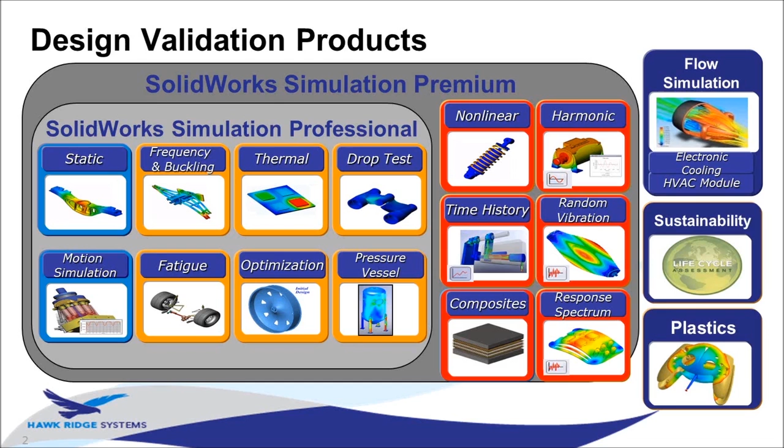Today we're going to take a look at what's new in 2014 with the SOLIDWORKS analysis tools. SOLIDWORKS offers a wide range of design validation products, including SOLIDWORKS simulation, flow simulation, sustainability, and plastics. We'll focus on the main highlights within each, starting with SOLIDWORKS simulation. Enhancements include the ability to automatically convert toolbox fasteners to bolt connectors, a new plot called contact visualization, the ability to mirror results when using symmetry fixtures, a contact pressure plot in a 2D simplification study, and an overall improved workflow when creating result plots.

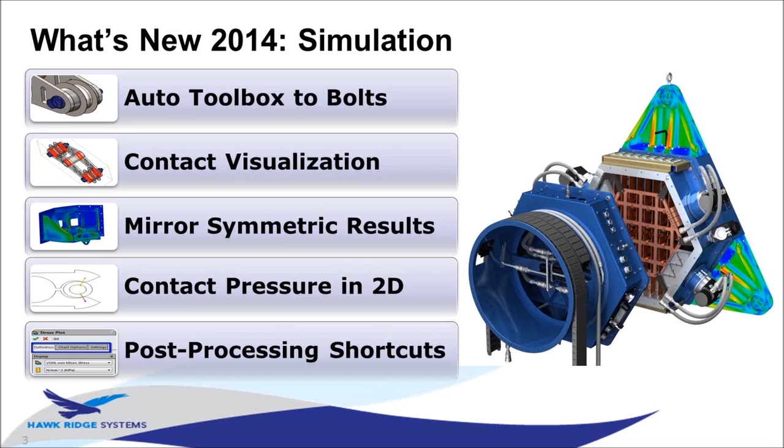We can now automatically convert our toolbox fasteners to bolt connectors when creating a static or nonlinear study. This functionality is only available with Simulation Professional licenses and above.

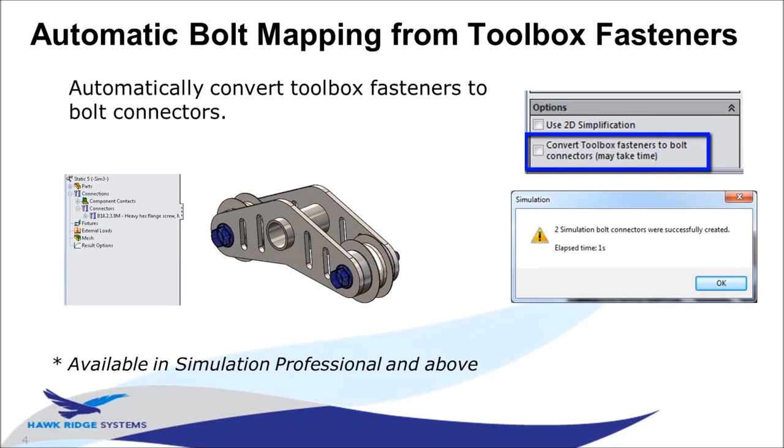In my assembly here, I have 4 different toolbox components, 2 bolts and 2 nuts. Previously, the workflow would be to suppress these 4 components, start a new study, and then manually create the connectors. Now I'm just going to create a new static study, but at the very bottom under options, we have the ability to check the box to convert toolbox fasteners to bolt connectors.

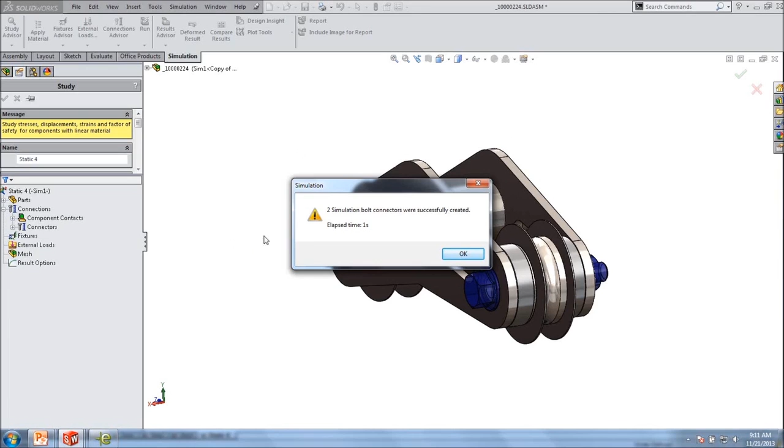When I click OK, it scans my assembly looking at the fasteners, and I get a message telling me that 2 simulation bolt connectors were successfully created. I can see them in my connectors folder. When I expand the parts list, I get an additional folder showing the components being excluded from the analysis since they were converted to connectors.

If I edit the definition on one of these bolts, we'll see that the corresponding edges and size of the bolt and nut were inputted automatically. It also pulled the material information from the toolbox fasteners, as well as the strength data and preload.

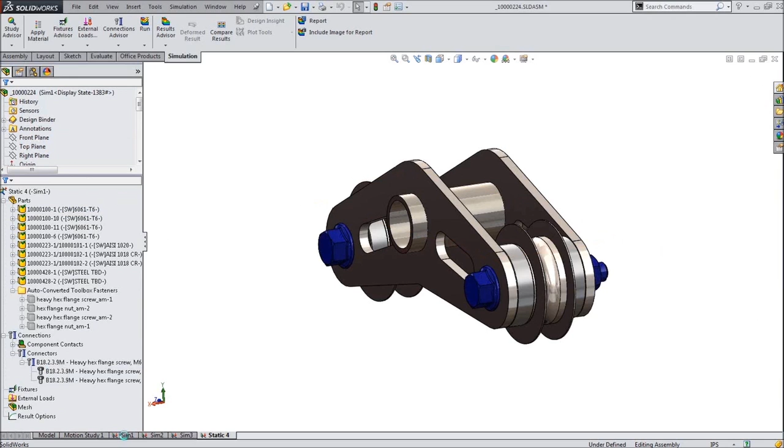After we run a study with any connector, we now have the ability to say list connector force. Previously we just had the option to list pin bolt bearing force. We see that this new connector force is part of the result force menu.

When I click on any of these rows, we'll get a flag appearing pointing us to the location of the connector with the corresponding forces. The other great thing about this is now we can also show the forces in spring connectors, spot welds, and links. So we're not just limited to looking at the pins, bolts, or bearing connectors.

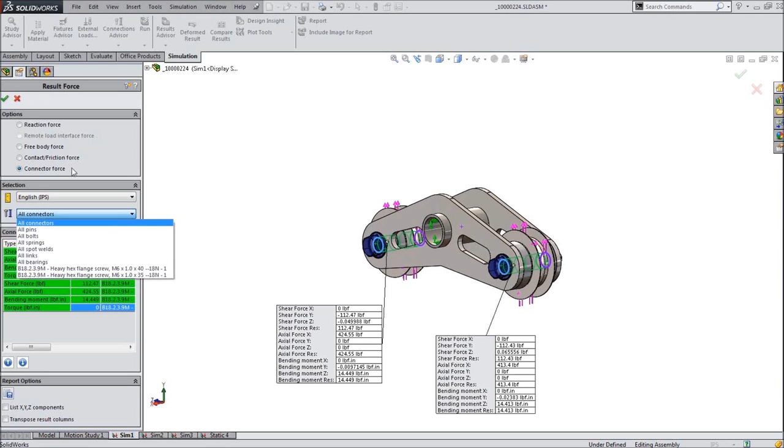For this assembly, I also wanted to take a look at some of the changes by modifying this front plate. Right now I just have these 2 slot cuts, but what happens if I didn't have any cutouts at all? How would my stress be affected? I have an additional simulation study and configuration for this, so I need to go to that study, activate the SOLIDWORKS configuration, and then show my stress plot to try to compare the results between those studies.

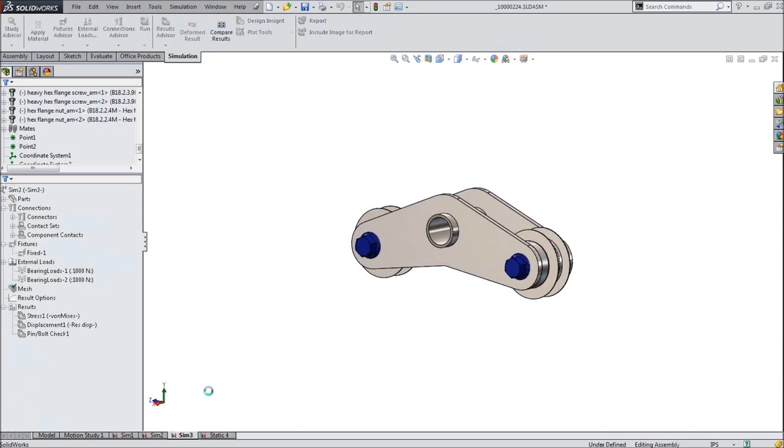I also have one where I have 4 vertical slots. Again, I need to activate the study, activate the SOLIDWORKS configuration, then show my stress plot.

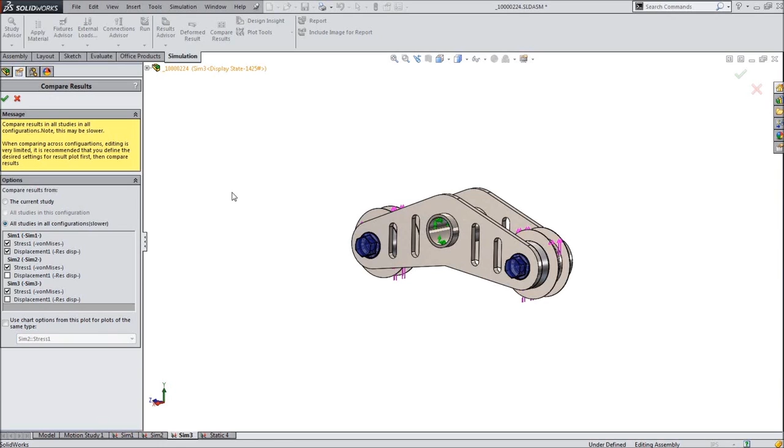In SOLIDWORKS 2014, we can now use the compare results tool to compare the results of our simulation studies across all of the different configurations for our model. Previously we could use this tool to compare the results of all the studies just with one configuration.

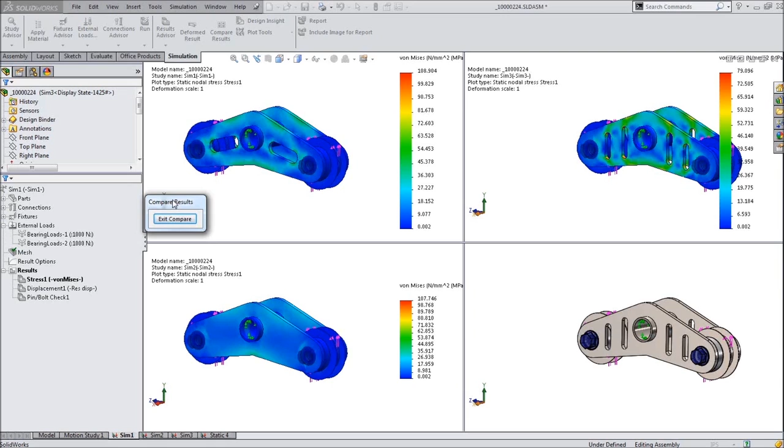I'm going to click OK, and now we get this nice tiled view showing the results of all 3 of those studies within one graphics window. No more switching between studies, activating the different configurations, showing the plots, and trying to compare them that way. Now we can do it all within one window, saving us a lot of time.

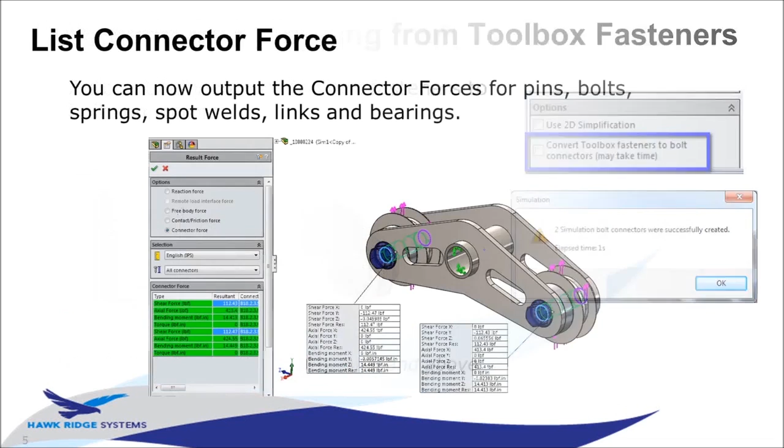So we saw the ability to automatically convert our toolbox fasteners to bolt connectors, the new list connector force menu, and the ability to compare results across configurations.

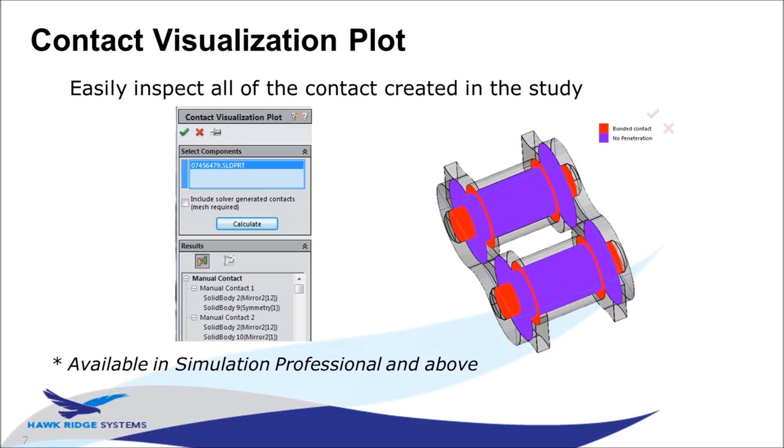We can also enable this new plot called contact visualization, which allows us to easily look at all of the different contacts within our study—not just the global contact conditions, but also the local contact sets. Again, this functionality is only available with Simulation Professional licenses and above, but it's going to be a real time saver to make sure we have all of our contacts properly set up within our analysis.

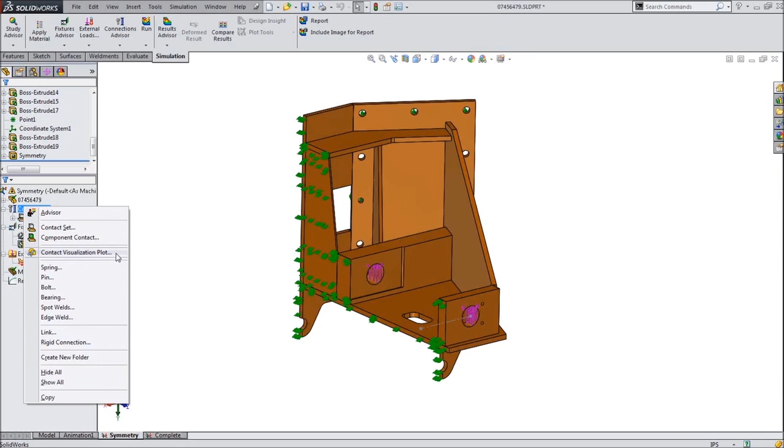So in this study, I manually created bonded contacts between all of the different faces. I'm going to right click on connections and enable this contact visualization plot. I just press calculate, and now I see all of the faces highlight that have that bonded contact, and I can click on each one in the list to see which faces are indeed being bonded together for that contact set.

Previously, if I wanted to get an idea of which faces would be bonded with just the global bonded contact, we could have run interference detection treating coincidence as interference. But that wouldn't really help me if I had any gaps in my model where I manually created the contact sets, or if I wanted to see where the different contact types are.

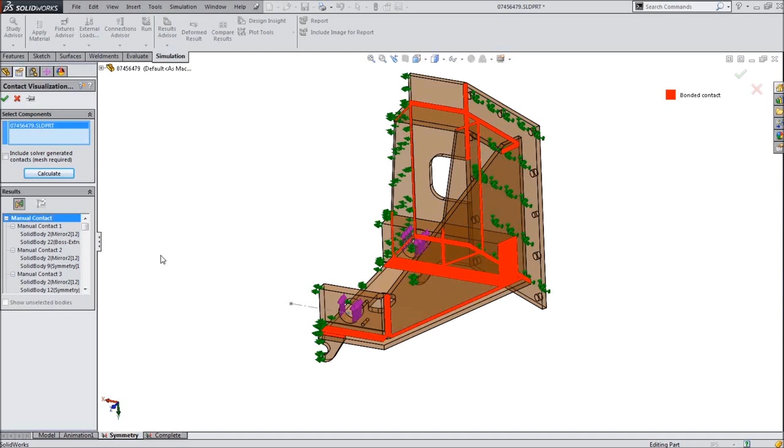So if I had some no penetration contacts, those would also highlight here in a different color. If I just wanted to see the contacts between certain bodies, I can just select them from the graphics window, press calculate again, and now it's pretty obvious that I indeed forgot to create one contact set between these two plates. So I definitely want to do that before running my study.

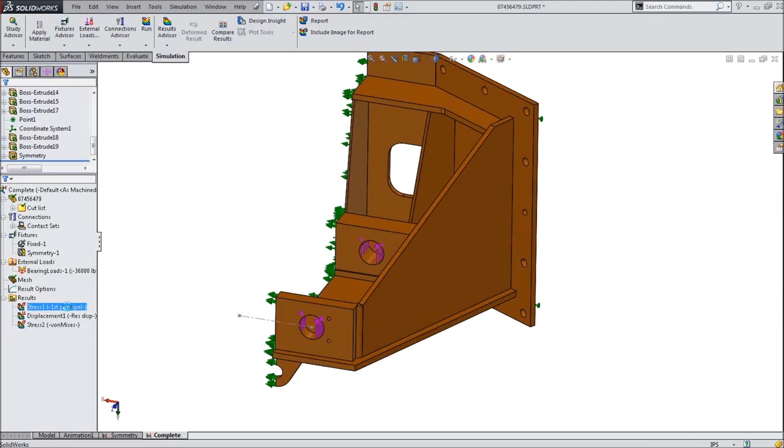Also, for this study, I use this symmetry fixture, and if you notice when I activated my stress plot, I can now see my stress across the entire model, not just the half that we actually meshed and ran using the symmetry fixture. The reason for this is if I go to edit definition of my stress plot, under advanced options, we now have this checkbox to display symmetric results.

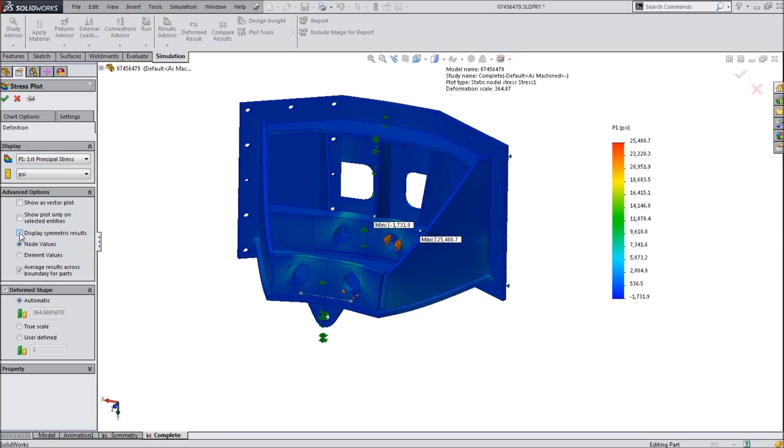So if I uncheck this and press OK, now this is what we used to have previously, just looking at our results on the actual model that we meshed and set up the study for. But with this symmetry fixture, just go to edit definition, go to advanced options, and say display symmetric results. So that was our mirrored results across planes of symmetry.

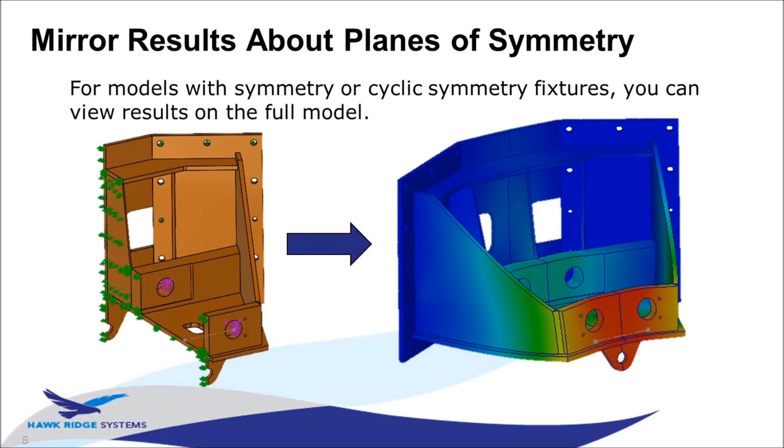And now here's my favorite enhancements within SOLIDWORKS simulation, just small little changes, but they're going to greatly improve the usability in creating your result plots. For example, we now have combined access to the edit definition, chart options, and settings within the same property manager.

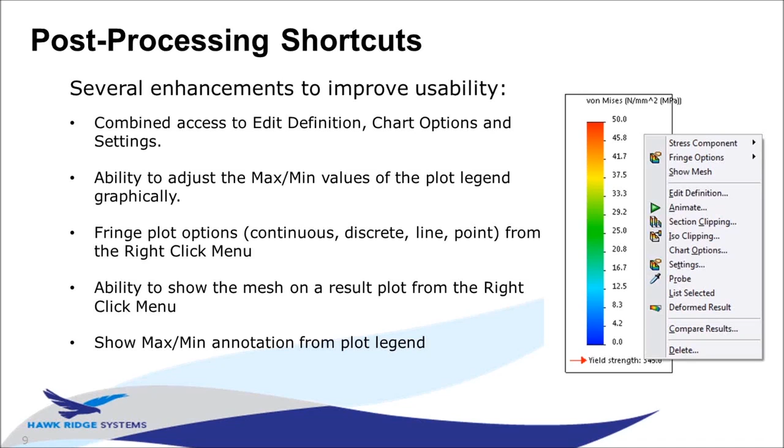We can modify a lot of these values just by right clicking on the legend, and we can dynamically change the minimum and maximum values of our legend just by clicking on that value in the graphics window. You might have noticed this when I went to edit definition of the stress plot. I now have the tabs to modify the chart options and settings within the same menu. So if I wanted to go to like a discrete color plot, maybe change my chart options to a user-defined scale.

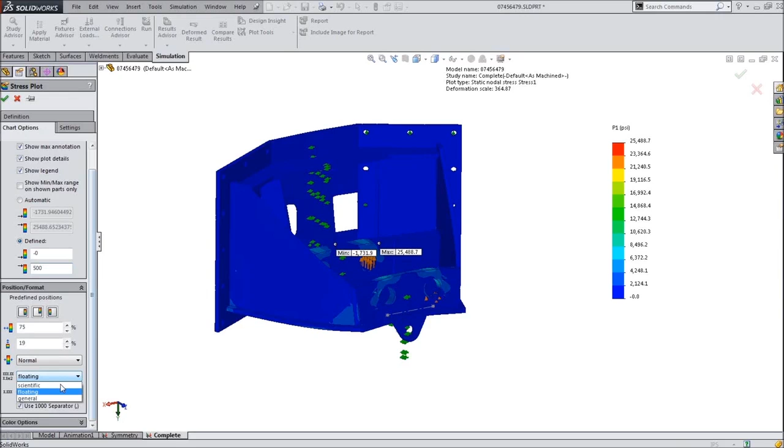Say between 0 and 500. I could also change the number format to scientific. And now I was able to modify all of those options again just within the same property manager.

So you're not going to have to remember, well, where's that option to show my undeformed shape over my model, or where do I show my mesh, or how do I change the legend, how do I change the deformation scale, or the different stress types. We can do that all within the same menu, saving you a lot of time and simplifying the workflow and just creating the result plot that you need.

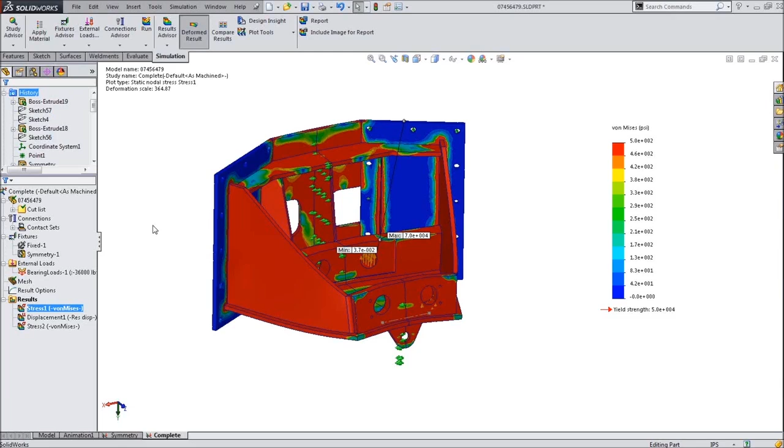A few other options we have: if we just right click on the legend, we can now show the mesh, change the fringe options, or change the actual component of the plot that we're looking at. So here, instead of looking at the resultant displacement, if you just want to see the vertical, we can switch to the Y displacement plot to again dynamically update our result plot.

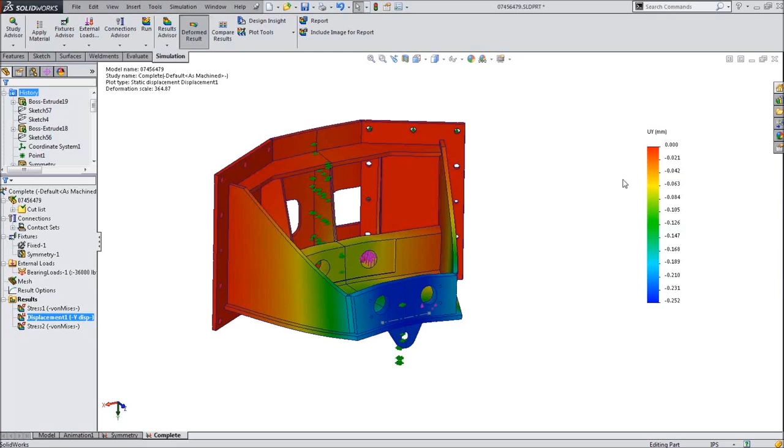I can also right click and say show mesh to overlay our mesh over our model. And if I wanted to change the minimum and maximum values of my legend, I can just click on the value in the graphics window here and then type in the value that I want. So I can say I want a max of 50 MPa, click the green check, and now my plot updates automatically.

What if I want to find out where this maximum stress is? Again, click on the value on the legend, and we can click on the show annotation flag, and now I get my max annotation. I can do the same thing with the minimum.

If I want to turn any of them off or reset them, just click on the value again. If I want to go back to my overall max stress, just reset the maximum. Click OK.

Again, just a lot of small changes, but really huge time savers when you're setting up your result plots. Just changing the min-max value of your legend, enabling the minimum maximum annotation flag, showing the mesh from the right click menu, changing the actual type of result from the right click menu, or when you actually go to the edit definition, chart options, or settings, you'll have tabs to change all of those options within the same property manager.

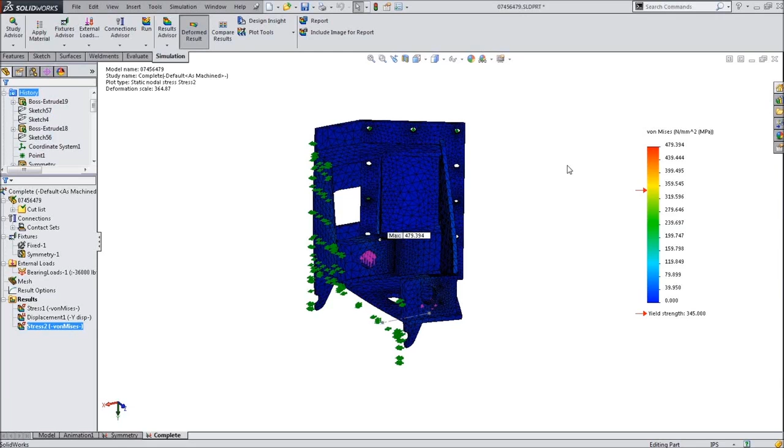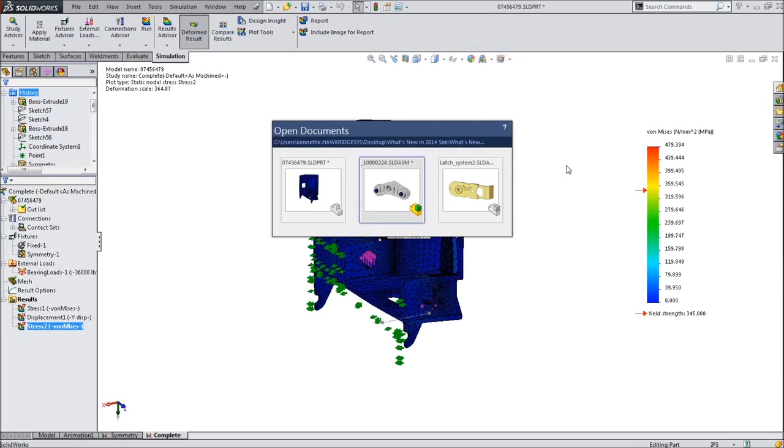If you set up a 2D simplification study, again, this functionality is available with SOLIDWORKS Simulation Professional and above, we can now look at a contact pressure plot. So here I have this latch assembly, and I want to run a nonlinear study to show my latch closing

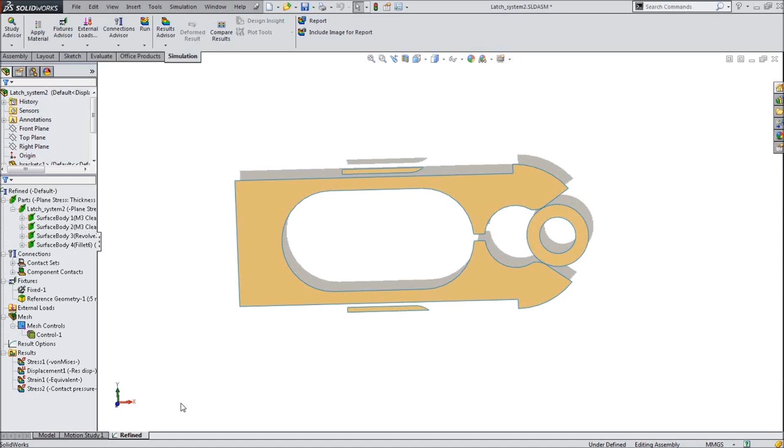and opening, and I want to see the forces as this latch locks. So I have a 2D simplification study, nonlinear study already created, and we can look at the stress and displacement. But for the stress plot, we also have this contact pressure.

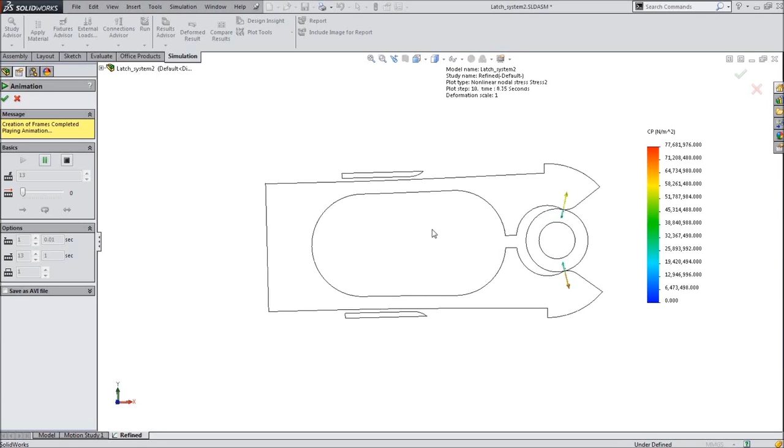So if I show that, we'll see the vectors of the contact pressure between our two bodies, and we can animate the plot to see the contact pressure update as our latch is closing.

So we always had the ability to show this contact pressure plot in just a stress analysis, but we can now do so in a 2D simplification study.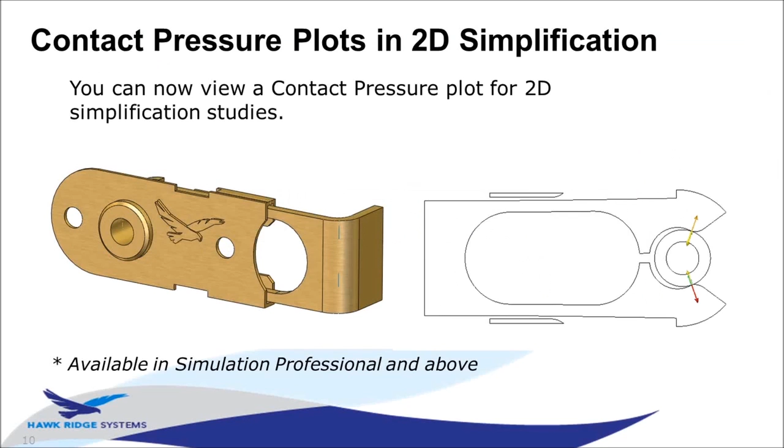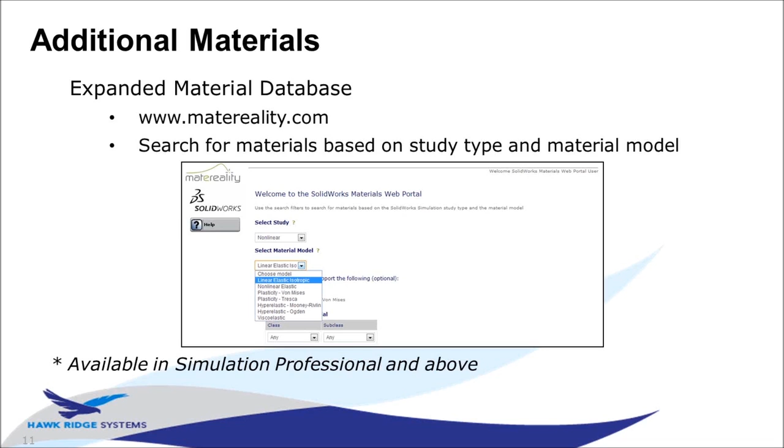With a Simulation Professional license and above, we now have access to additional material models. That's through this Matereality material database, which you can find online. So when you go in and say apply edit material, there will be a link on the bottom left saying click here to access more materials.

It's going to bring up a web browser, and we can now search for additional materials based off the type of simulation study we're running and the type of material model I want.

So let's say I want some material with a stress strain curve so I can get plastic deformation. So we can go to plasticity von Mises, choose the type of material. Maybe I want to look for some additional metals. Then I just need to press locate materials.

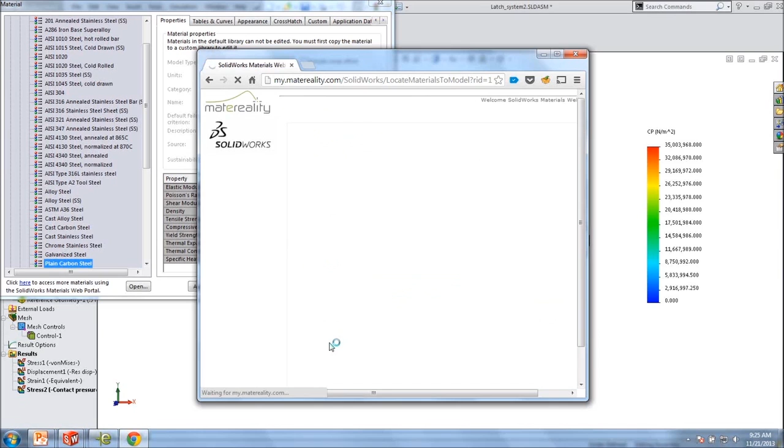It's going to search the database and then give me a list of all of the different materials that match my search criteria. Okay, so say I want to look at a 2024 aluminum, just click on the icon.

Another window will pop up so I can see the actual material properties. Come to the tables and curves tab and actually see the stress strain curve for this 2024 aluminum alloy. Okay, then I just need to download this, then I can load it in my material library and then use this in any of my studies.

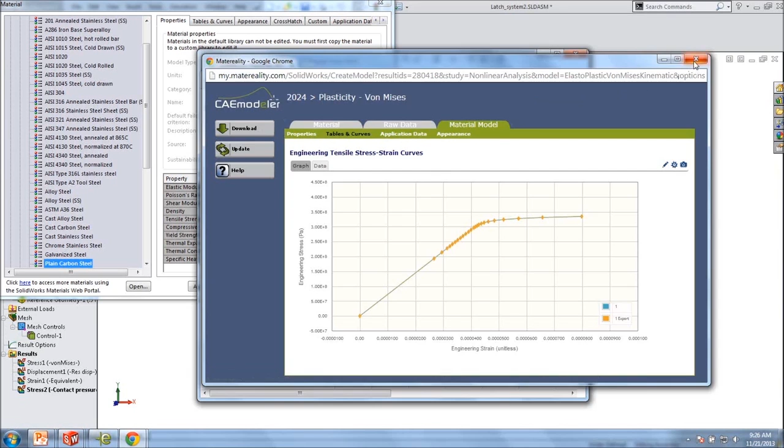In terms of performance, there's again quite a few enhancements. The main one being an additional solver type that we call a large problem direct sparse solver. So when you start to run large studies, here we're getting up to a few million degrees of freedom. The direct sparse solver previously would fail. But now we have access to this large problem direct sparse solver, so we can now solve those large studies.

And even with studies that did solve with the direct sparse, they're just going to be quicker using this additional solver type. Also, just for the iterative solver or FFE plus, again, you're going to see performance increases or solution time decreases just when you run your different studies.

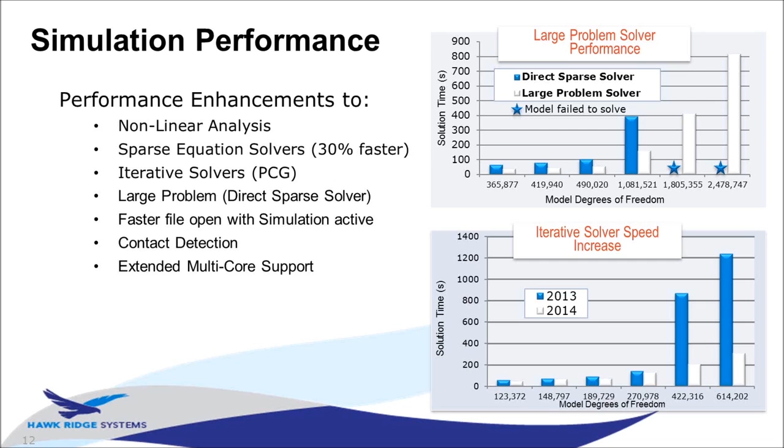Alright, now let's switch gears and take a look at flow simulation. The main new enhancement with flow simulation is just an overall tighter integration within CircuitWorks. So if you do any sort of electronics cooling, this will really be a useful enhancement for you.

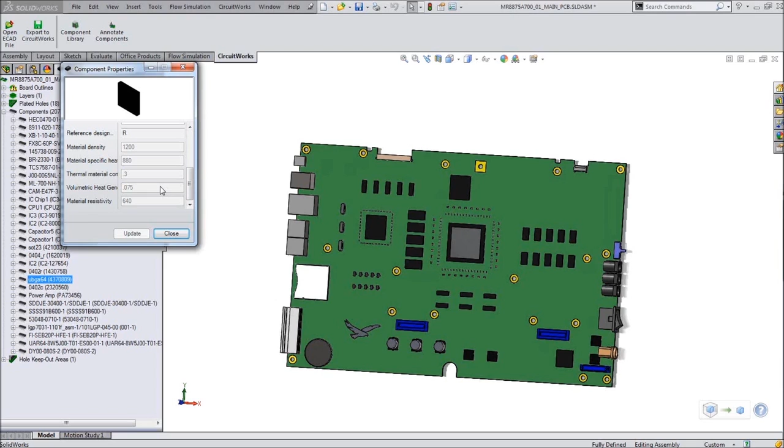So I have my imported ECAD model using CircuitWorks into SolidWorks, and if we take a look at the properties for some of these components, we'll notice there's additional material properties, so density, specific heat, thermal conductivity. There's also this volumetric heat generation rate property that's applied to some of these components.

Okay, so if I come to the CircuitWorks drop-down options properties, we'll see the different material properties that can be imported from your ECAD file into CircuitWorks and SolidWorks.

So what this will allow us to do is when we set up a flow simulation project, we can now scan all of the components and then look for those material properties or heat generation rates and have SolidWorks automatically create those solid materials for us and heat sources. Again, just saving you a lot of time and any potential user input error.

So I'll come to my flow simulation. I have a new project here. So now I would want to try to import some of those properties to my project. So just come to the flow simulation drop down, tools, and we can say import data from model.

Okay, it's just going to scan all of the different parts in my assembly, and it'll give me a list of all the different materials and volumetric heat sources that it found. Okay, so we can see it's quite an extensive list here. Just press import, and now it's creating those solid bodies, solid materials, and volumetric heat sources for me.

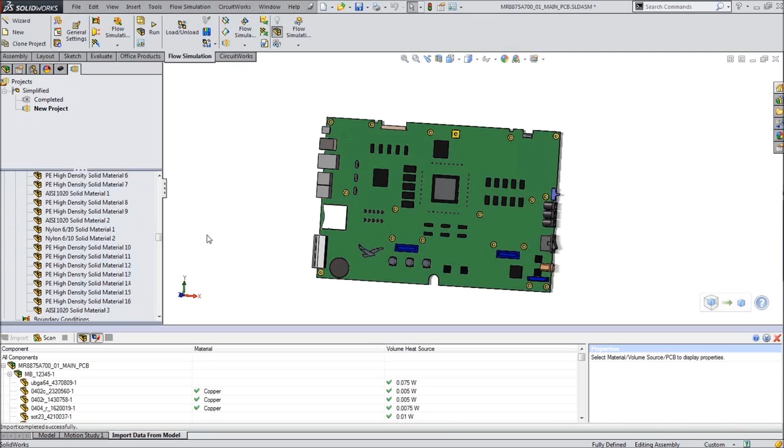Okay, so we can see all of the solid materials it added. Scrolling down further, all of the heat generation rates, you can see it created over 180 different heat sources for me. Previously I would have had to manually select all of the bodies and be sure I input the correct values for each one of these components. Now, since they're just properties from the ECAD file imported through CircuitWorks, we can just have SolidWorks create these heat sources for us automatically.

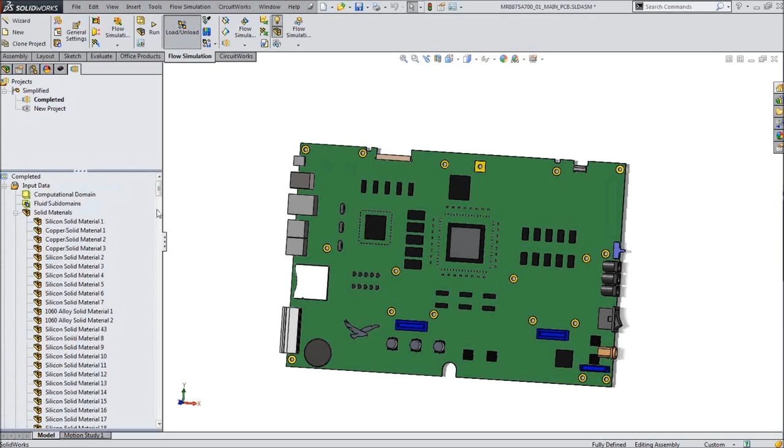Okay, so we can take a look at some of these results. We can show our cut plot, look at a surface plot, looking at the temperatures on my board and components, and our flow trajectories.

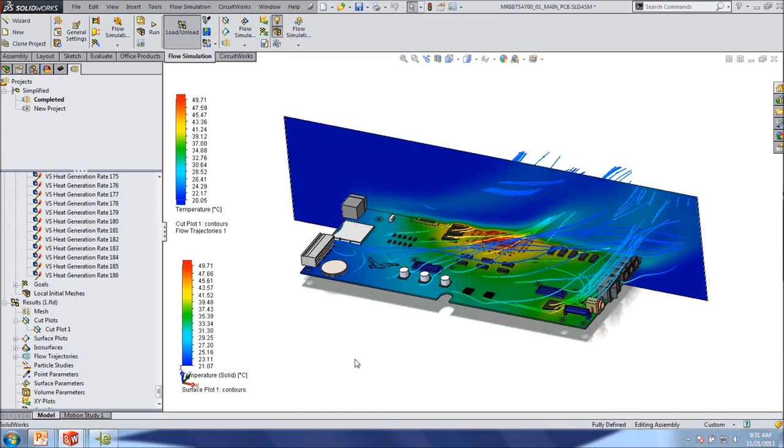Okay, so now that we have our results, how can we share this information with other people? You may be familiar with eDrawings, a way that you can share your model drawings with other people without needing to have SOLIDWORKS installed. We can now do this with flow simulation, and I can send them all of these flow result plots within one file.

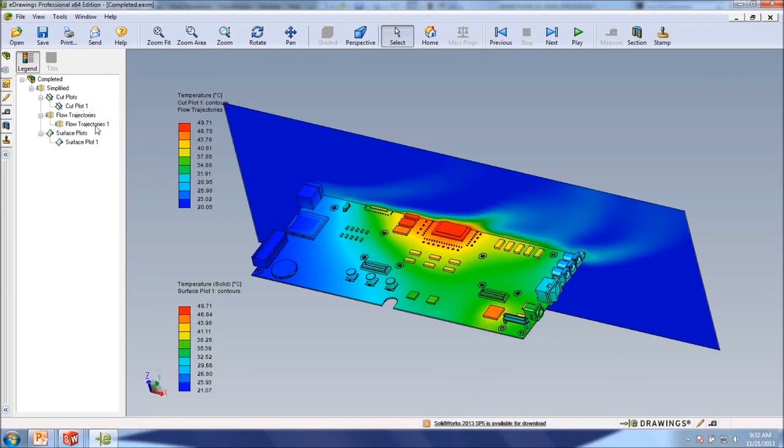So if I come over to eDrawings, we see all three of those result plots that I just had, and we have the ability to hide any of these. Okay, you can still have access to rotate the model, move things around, show the different plots. So again, just a tighter integration between the different products. We can, within eDrawings and flow simulation, now export multiple results to a single eDrawings file.

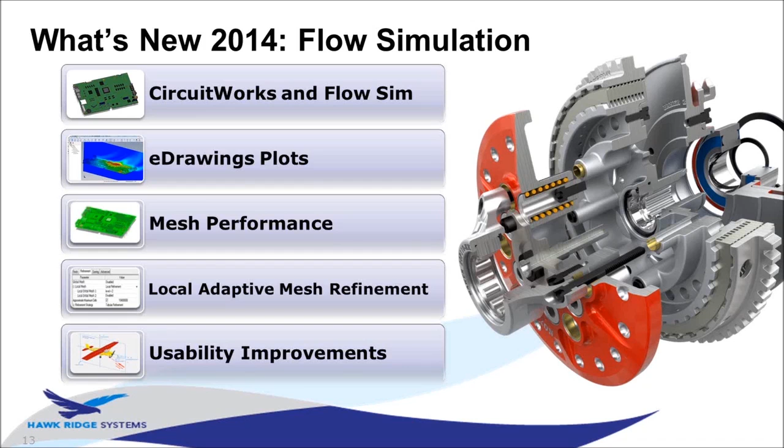Okay, so here are the different properties that we can import from CircuitWorks into flow simulation. We saw the improved eDrawings plots. In terms of performance in flow simulation, the mesh process can now utilize multiple cores in your processor, so you'll see significant speed increases if you do have a multi-core processor. The solver always supported multiple cores within the processor, but the mesh can do so as well in 2014, so again, just overall speed increases when running your flow projects.

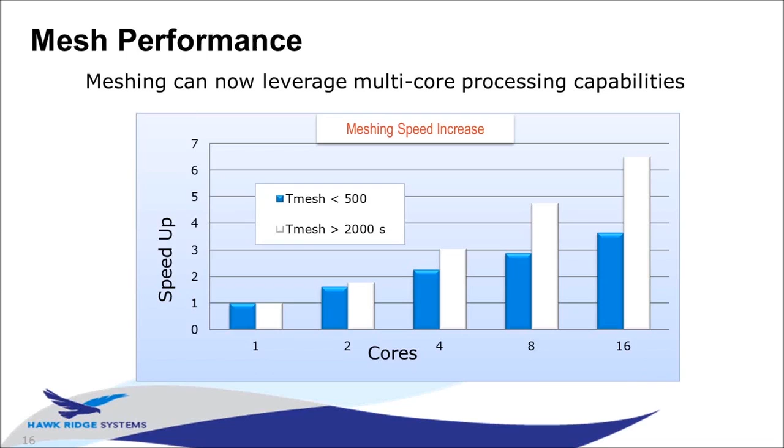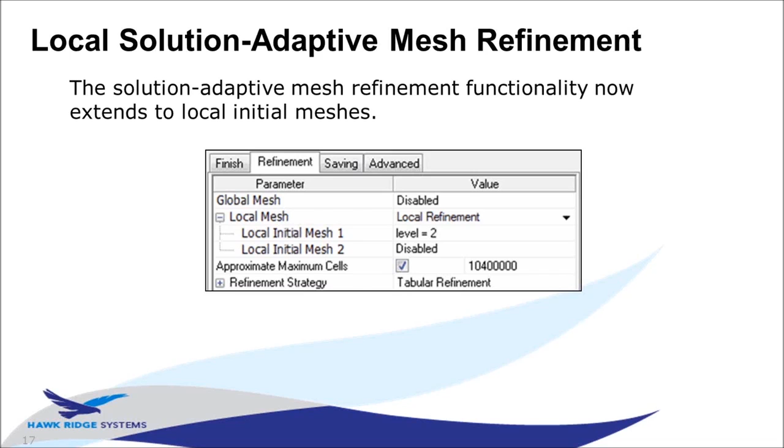If you use the solution adaptive mesh within flow simulation, we can now do that at a local level. So if you have any local initial meshes, you can turn on the solution adaptive mesh just for that local mesh and not globally.

And there's a few other usability improvements, such as the leak tracker being available from the graphics window. We can now change multiple boundary conditions or heat sources at once. So if you wanted to just change the wattages of all your heat sources, you can shift select them and edit the magnitude of it. And for the ambient velocity, we can now specify that in terms of aerodynamic angles instead of manually specifying the 3D vector for velocity.

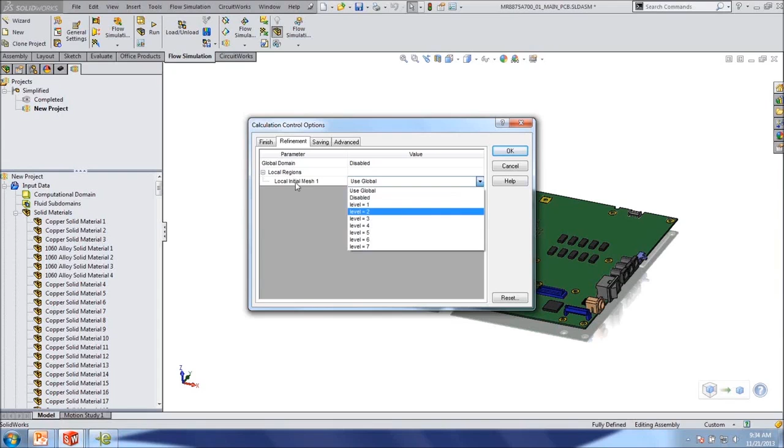Okay, so if we come to the calculation control options refinement, we now see we have the ability to apply the mesh refinement just at the local initial mesh level. If I wanted to just modify a few of these heat sources at once, just shift select them, and when we edit definition, we can change the magnitude of all of these. So we can say all these are going to be 0.1 watts.

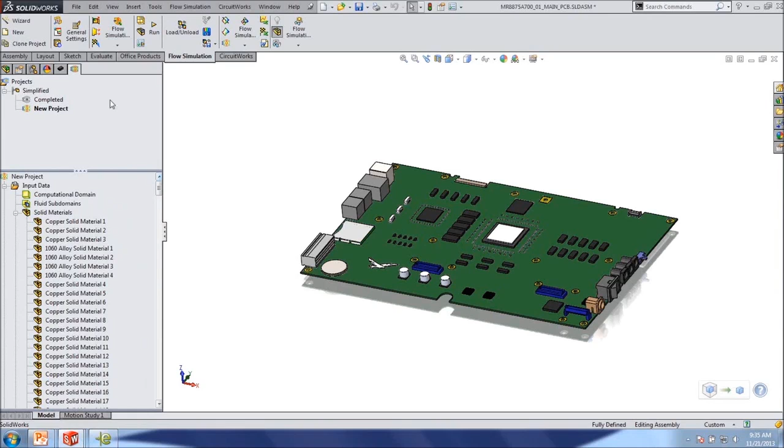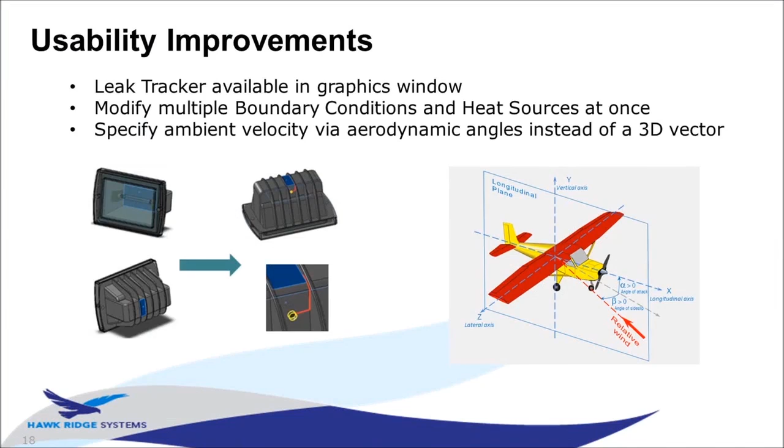And if we come to the general settings, the initial ambient conditions, for the velocity, instead of defining it by 3D vector, we can specify the velocity via aerodynamic angles. Okay, so those were the highlights with flow simulation.

Finally, now let's look at SOLIDWORKS Plastics. Within Plastics, they introduced quite a few new wizards, again just trying to improve the usability of these projects. So now there's a getting started wizard. They completely redesigned how we define runners within a Plastics project, again just going to save you a lot of time. The dynamic result advisor gives you a lot more feedback on the results of your Plastics project.

But really the main enhancement is, again, tighter integration between SOLIDWORKS Plastics and SOLIDWORKS Simulation. So we can now export the residual stresses and temperatures from after the packing process with Plastics Premium, and you can now run a nonlinear static analysis using those residual stresses or in-mold stresses from Plastics to see how your part will react to those residual stresses and temperatures.

Okay, so let's take a look at this iPhone cover.

First, just to get us started with setting up and running our plastics project, we can enable the Getting Started wizard. If you're familiar with the Simulation Advisor, it's going to be a very similar workflow, just taking us step by step through what we need to do to actually set up and run our project.

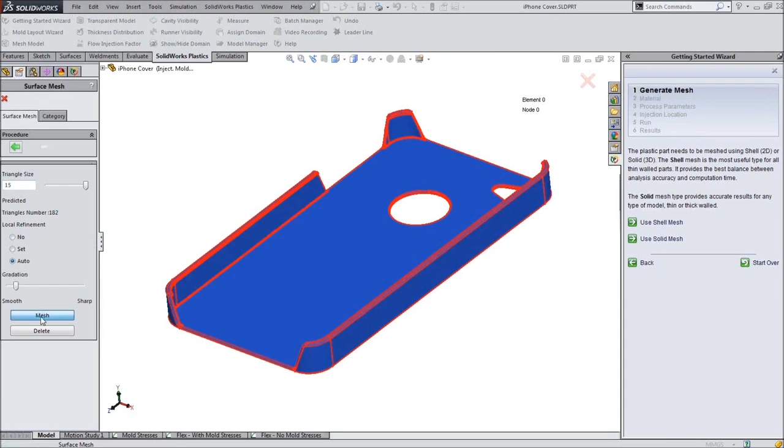So we can create our mesh. We can use the automatic settings. Looks good, so we can accept it.

Going back to our wizard, now it's going to ask what material do we want to use. It'll show us the material with the melt temperature and mold temperature. Just clicking change material will bring up the material library, so we can change our plastic.

Next, what are the machine details? We see the fill time and the injection pressure. Again, this fill settings menu was revamped, so we can easily change any of these options. If we come to the advanced tab, we'll see the machine database and machine properties, so we can modify those as well.

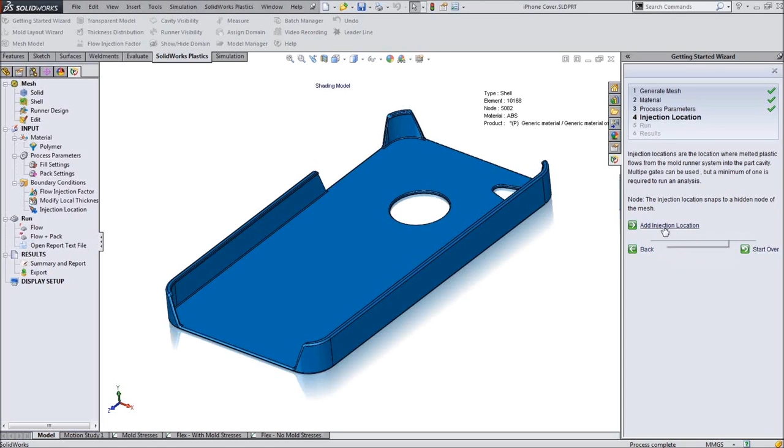Next, we just need to specify where the injection location is. Previously this was just called the gate location, so we say add injection location. We can pick a point, and we can also ask for the predicted flow pattern of this injection location. Okay, that looks pretty good, we'll click OK.

And now we just need to run this plastics project.

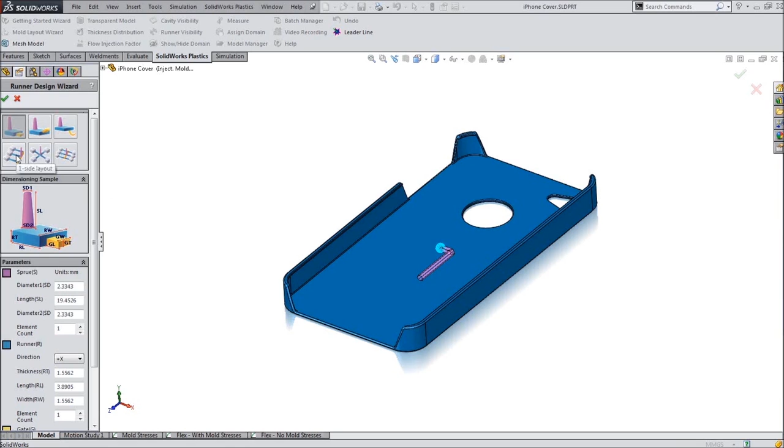They redesigned how we define runners within plastics. If we come to the runner design wizard, I no longer need to have sketches for where I want my sprue, runner, and gate locations to be. I can now select the runner type and then manually click on some locations, and then from the property manager, the wizard, I can specify what diameters and lengths I want for the sprue, runner, and gates.

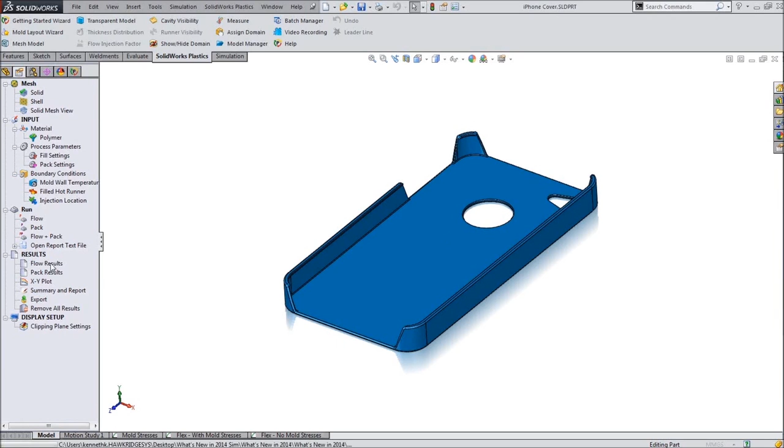Once we have a plastics project with results, we can come to the dynamic result advisor, and this top section is going to give us a lot more feedback on the performance of our part, and some suggestions on how we can improve the performance.

At the very top, we get our stoplight icon telling us the ease of fill. Then it's also going to tell us what the injection pressure was, how it compares to our machine, the different temperatures, and how that could affect our material selection. So again, just a lot of good feedback on what our result plots are actually telling us, and some suggestions to improve our overall part and mold design.

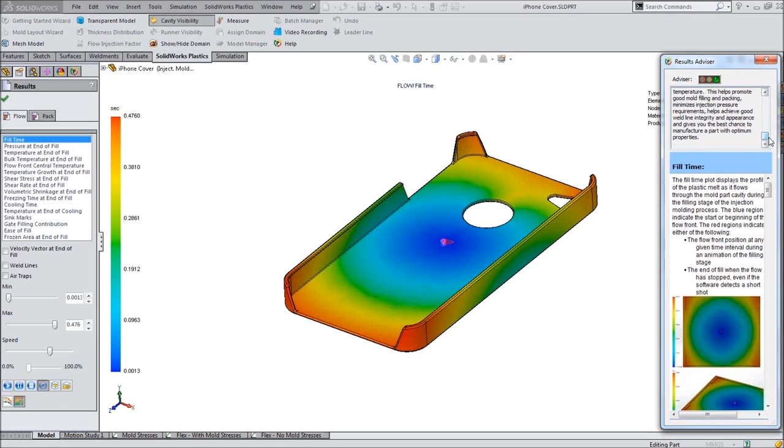After running the pack process, we can look at the temperatures and the residual stresses, but we can now come to export these results into SOLIDWORKS Simulation. So we can export the in-mold residual stresses just by clicking export, which would save out this result file.

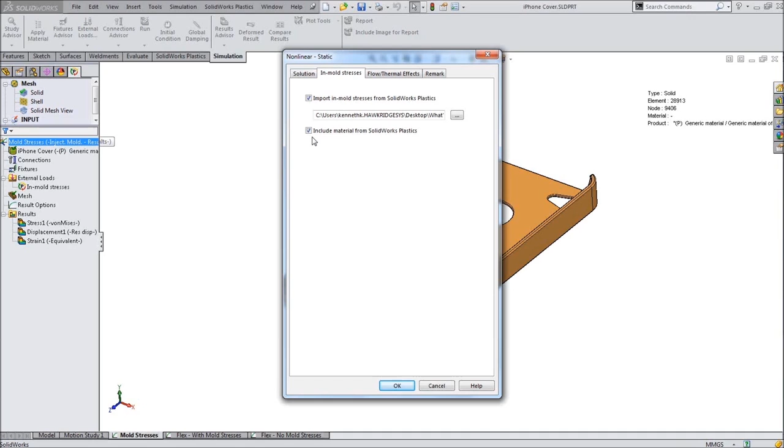When we come to a nonlinear static study and go to the study properties, we now have this tab that says in-mold stresses, so we can import the in-mold stresses from SOLIDWORKS Plastics. We can also include the material from SOLIDWORKS Plastics, so I can get more accurate results by using the actual plastic material properties between the two programs.

Click OK. Now we see the in-mold stresses from plastics as my external load, and we'll be able to see what the displacements and stresses would be.

Okay, let's animate our displacement plot to see how we'd expect our part to shrink.

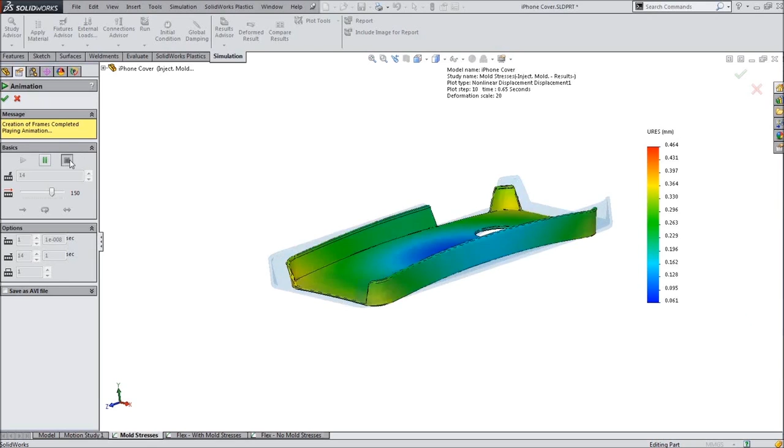So we saw the getting started wizard, the new runner design wizard, and the improved dynamic help advisor. But really, if you do have Plastics Premium and Simulation Premium, we can now import those temperatures and in-mold stresses from Plastics into a nonlinear static study to predict how our part will shrink and the stresses within it.